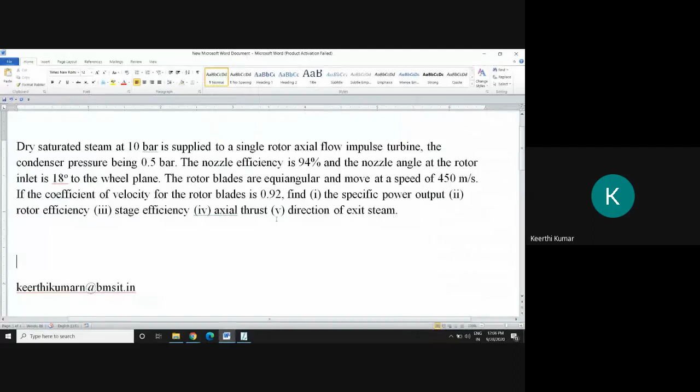I hope you have copied that question. I also told you to open the steam table. If you're having a steam table, open it, or else no issue — I'll explain the concept of how to solve it. Later on, you can go for the steam table, have a look, and take the values from the steam table.

So now we will solve today's problem. Understand carefully what he has given, because this same type of problem may come for the next chapter too — a similar kind of problem.

See what he has given: a dry saturated steam. I don't know which turbine it is, whether it's a multi-stage or a single stage. First, we understand that it is a dry saturated steam, and we will go for that first.

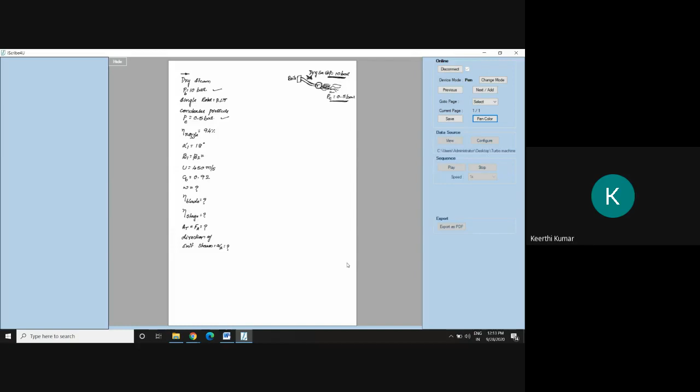If I want to go for the velocity triangle, the inlet velocity triangle, what are the three parameters required? I told you three parameters are mandatory to draw the velocity triangle. What are they? Anyone? To draw the velocity triangle properly, three parameters are mandatory.

The first one is U, second is alpha 1, third is V1. If you know these three, you can complete the inlet velocity triangle easily. And to go for the outlet triangle, we want two parameters — one is CB and one is beta 2. If you know these two, you can go for the outlet velocity triangle easily.

But for this problem, are all three parameters given — that is U, V1 and alpha 1? No, sir, no sir, we have to find V1 here. Yes, we have to find V1.

To find V1, these values are given — that is the boiler pressure, condenser pressure, and nozzle efficiency. See, all these three conditions given so far are just to identify V1. These parameters he has given are only used to find V1. V1 can either be given directly, or he can give it in this way. So using these three conditions, I will solve for V1.

So how to find out V1? That V1 can be identified and determined with the help of the steam table. See here, observe this carefully, how to draw that.

To find V1, we make use of steam tables, or what is also called the Mollier chart, for example. If you go for the Mollier chart, later I will draw the graph.

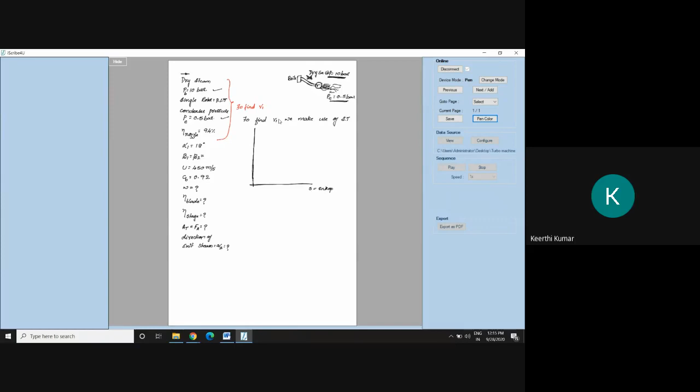See, in the x-axis there will be entropy, that is S is equal to entropy, and in the y-axis it will be H, that is enthalpy. This is properly known as the HS diagram.

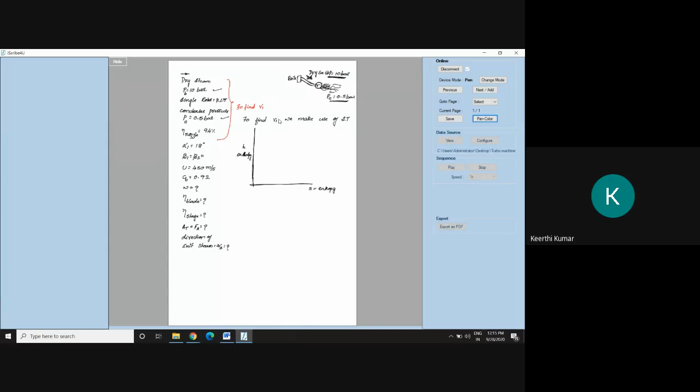In this, I think probably you have observed there may be one thick line. Have you observed this line, this curve in a Mollier chart or HS diagram? This was the graph, and this indicates what? Can anyone remember from BTD? I will not cover unnecessary things, only whatever is necessary for my chapter.

In the same Mollier chart, you will be having one more curve. I'll show that, those curves will be like this. So these curves are called pressure curves.

So this will be P, this will be P, this will be P. For example, let me take this as 100 bar, this will be 10, this will be 6, this will be 5, or else this will be 0.5, like that it will be having. If you do not remember, please go for the Mollier chart and check out.

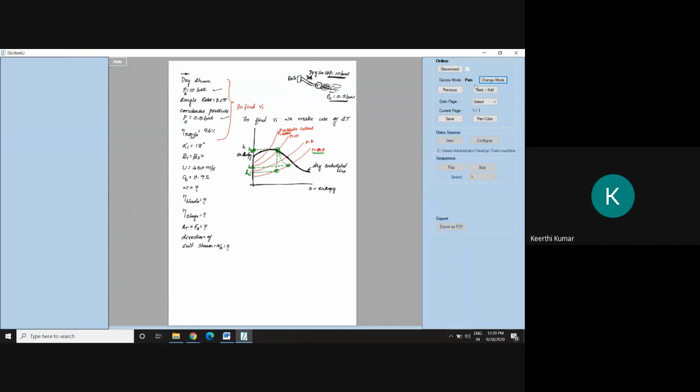But in the given condition, in the given problem, with the given data, I cannot find out H2. I can only find H2 dash. So as per the given data, first what I did, with the help of dry steam and P boiler equal to 10 bar, I found out H1.

Okay, that is correct. Then second, what we did, with the help of PC equal to 0.5 bar, what did I do? I dropped down the vertical line from H1 and I found out H2 dash, where this is called ideal exit condition.

And H2 is actual exit condition of steam. So actually we want actual condition of the steam, but he has not given that in this question. He has not given actual condition of the steam. So only we can take out H1 and H2 dash.

So I will give the values now, you can cross verify later on. So H1 from the graph, I got 2780 kilojoules per kg. This is the H1 value I got from the Mollier chart.

And what about H, whether I will get H2 dash or H2? I will get H2 dash. So H2 dash is equal to, what is the value I got? 2270 kilojoules per kg. Above also, that is also kilojoules per kg. I got both the values.

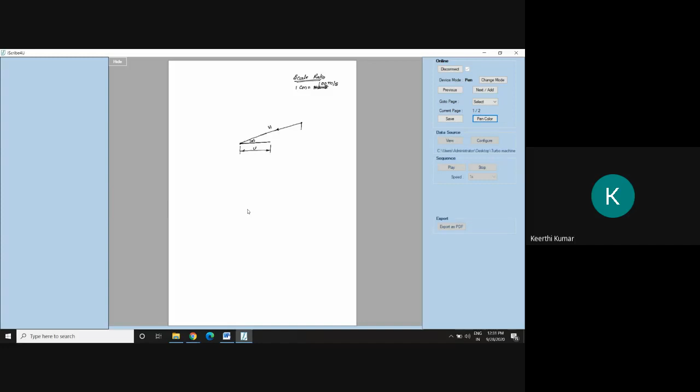Then you drop down the vertical line. Name this as VA1, put the arrow mark in the downward direction. Then you extend this line. From this end, you finish the triangle to the apex. Connect that triangle to the apex and then finish it. This is called VR1, or relative velocity at the inlet.

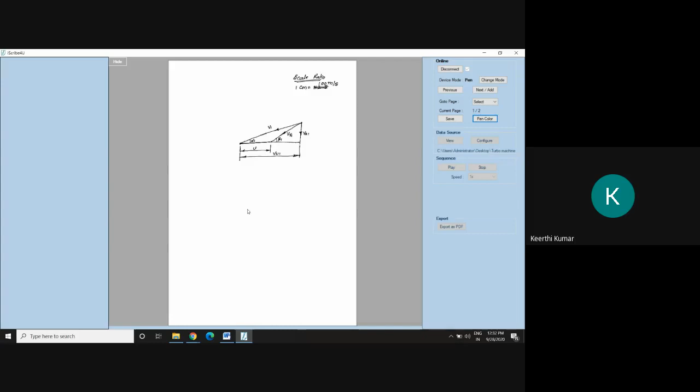VA1 is axial velocity at the inlet. V1 is absolute velocity at the inlet. Alpha 1 is the angle of the nozzle, and this is called beta 1, the angle of the blade at the inlet. The distance from here to here, we are going to call VU1, that is whirl velocity at the inlet, also called tangential velocity at the inlet. Whirl velocity or tangential velocity.

We came to know all the values from the inlet, so you put a table. Inlet table - this is not mandatory. Somebody asked in the last class. This is not mandatory, but it will be easy for you if you make a table.

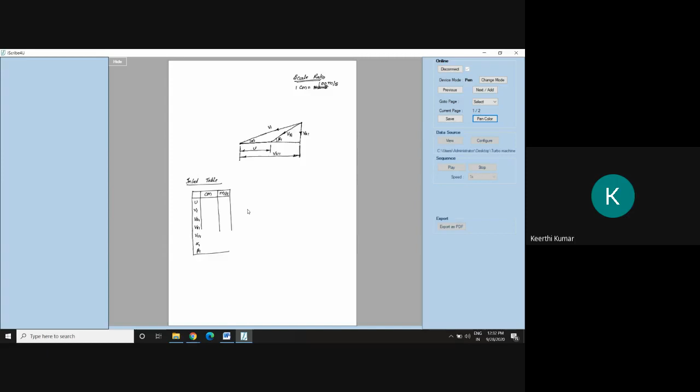So what to write here? You write in centimeters, meters per second, you write all the values. That is U, V1, VA1, VR1, VU1, then alpha 1, beta 1. So you put a table and mark the table along with the values.

Write down this problem very carefully, very neatly, because today I asked the same thing as a quiz. You have to submit this as a quiz. Clear? So write down the values in meters, centimeters and meters per second. I hope you can do this.

Then we will go for the outlet triangle. To go for the outlet triangle, something is required. What is that? Beta 2 is required. I'll go to the previous sheet. What is the beta 2 value? He has given beta 1 is equal to beta 2. And also we want CB. CB is known. So where will we get beta 1 and beta 2?

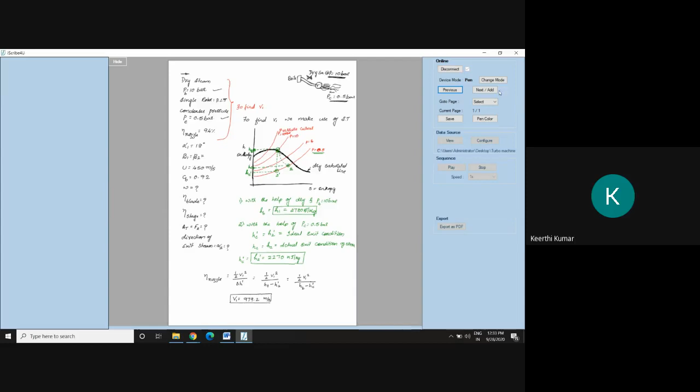If I draw the inlet triangle, I can get beta 1, and CB is given. So moving from inlet triangle to outlet triangle, we know that beta 1 is equal to beta 2, which we will find from the table. And CB is equal to VR2 by VR1. CB is given as 0.92. You find out the value and write down what I'll get from this - I will get VR2, and also I'll get beta 2 from this. Then you draw the table.

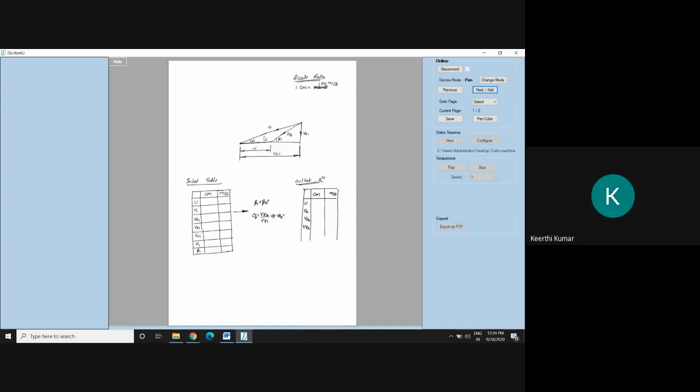You complete the table properly, in centimeters, meters per second. So what are the things you want? U, V2, VA2, VR2, VU2, alpha 2, beta 2. So this is the outlet table where you are going to draw. This is not mandatory; whatever it is asked, if you show that, that is enough.

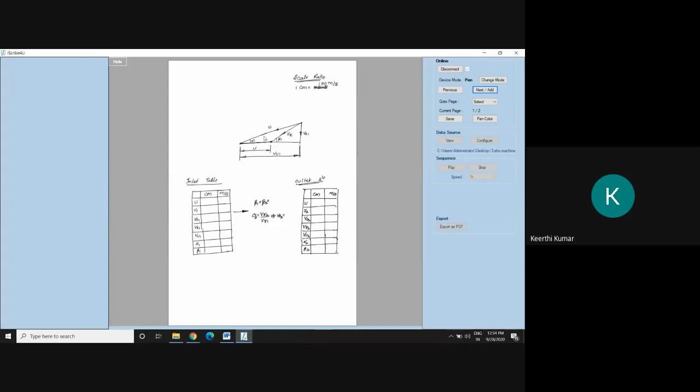But this will be easy for you for substituting in the formulas. So VR2 we got and beta 2 we got. Whatever the beta 1 is given, along with that same value as beta 2, you draw the line. If you draw the line here, this line is called beta 2, angle is called beta 2, and the name of this line is called VR2. So once you know this, simply drop a vertical line, connect this, extend. So this line is called V2, and this is called VA2. And this is called alpha 2, and the distance from here to here is called VU2.

So inlet will also finish. All the values you can put, outlet also you can put everything. Without any problem, you can complete the inlet and outlet triangle. In this problem, the only thing you are supposed to learn is what is V1, how to find out V1, because V1 is not given in the question. You're supposed to find out how to get the value of V1.

Now I'll go for the unknowns. First unknown, what is given? He is given the specific power output, that is small w, or the Euler's equation E. The formula is U into VU1 plus VU2, plus or minus. This may be plus or minus, you identify from the figure that already I explained. You'll be knowing VU1, you'll be knowing VU2 from the figure. So find out W; it will be in terms of kilojoules per kg.

This is finished. Then the second unknown he has asked is blade efficiency. What is the formula for blade efficiency? W by half into V1 square. We know W from the above step, and then half into V1 square also we get. So that multiply with 100, you'll get the efficiency in percentage.

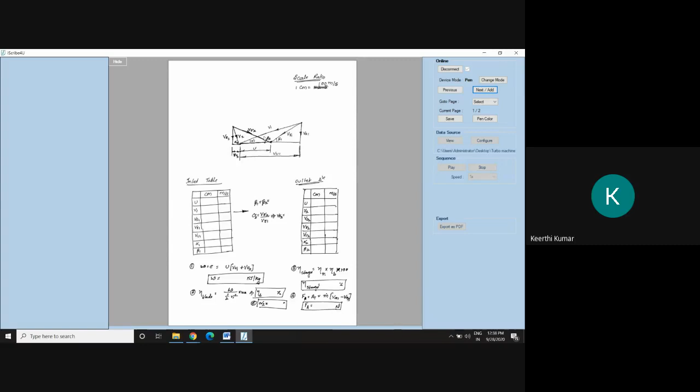This is in Newton. The last unknown asking, I'll write here, fifth unknown. Fifth unknown is asking exit steam direction, that is alpha 2. Direction of the exit steam is asking, you tell the alpha 2 in degrees. So this completes all the unknowns, all 5 unknowns. Alpha 2 is nothing but exit steam direction, direction of the steam at the exit is called alpha 2.

Yeah, if anybody having doubt, you please tell me. Hello? No doubt, sir, no doubt.

But see, this W is equal to, what is the value for W or E? It is called Euler's equation, or it is also called work done, or it is also called specific power output. Specific power output is small w. If it is a power output, capital W with dot. Okay, or it is also called P.

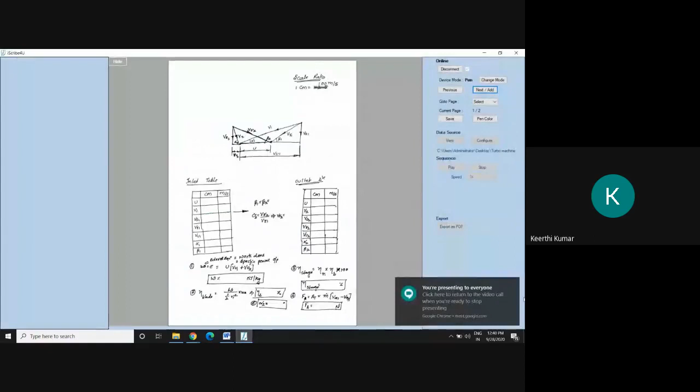Hello, sir. Hello, sir.